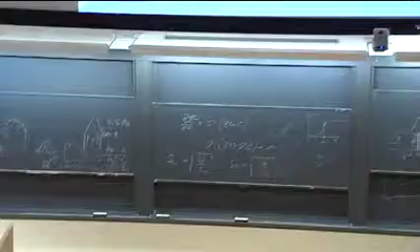We looked at models for the large-scale and small-scale turbulence regime by Damköhler, and these really capture all the physics. But they are two different expressions for two different regimes. It turns out one can derive an expression for the turbulent burning velocities that has these same limits, going to these expressions in the right limits, and one can derive that from an equation for the flame surface area ratio.

Flame surface area ratio, that was this sigma we had introduced earlier. This is very nice, so one derives an equation for that sigma. Let's see that equation. This would be an instantaneous equation for that sigma.

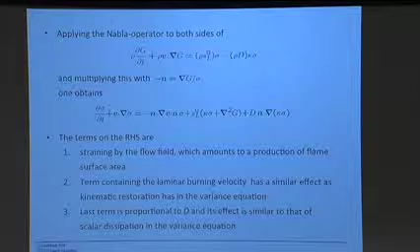In this equation there are some production terms. Well, there's of course the production term, which comes from turbulence. And there are two different dissipation terms. One is a dissipation term that takes out flame surface just by burning. We call this the kinematic restoration.

The simple physics behind this: you have something like this, a lot of flame surface, but if it burns this way and that way, once this is burned out, you have taken out flame surface. Just the process of burning itself eliminates the flame surface. That's what's called kinematic restoration.

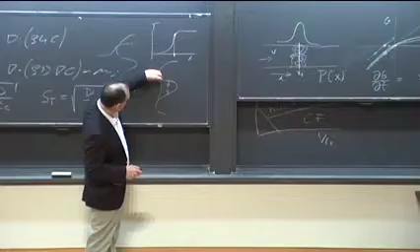And then there is also a dissipation of flame surface just by, again, the curvature effect. You can look at it like this also: if there's very strong curvature here, just by a diffusive process, the flame surface goes away. So that is the sigma equation.

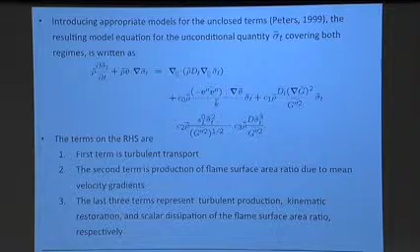Now the assumption is that these terms are being modeled. Let's see, here's the mean equation, and now you have all these terms on the right-hand side. We introduce models for these, and then assume that production equals dissipation, so the production of flame surface equals the dissipation of flame surface, which lets us discard these transport terms on the left-hand side. Then this can be solved for the sigma turbulent, which gives you an expression for the turbulent burning velocity.

This leads to an algebraic equation like this, and at the end of the day, this is what you get. You see there are lots of coefficients, and these coefficients mostly come from theory. You see that delta S here, that would be S turbulent minus SL, so that's the increase of the burning velocity by the turbulence.

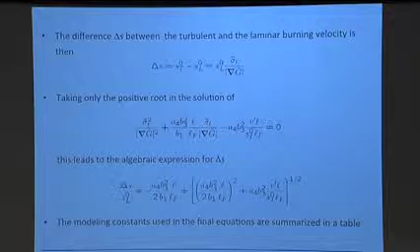And that is now a function of L over LF and V prime over SL. It's a quadratic equation because this was a quadratic equation, so it's a quadratic solution and so on.

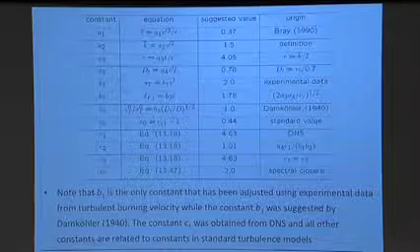There's a table with all these values here, and most of them come from either a definition, or from some theory, or typically used values like this. And then here there's this coefficient, which is actually the proportionality coefficient in this relation. Damköhler set that equal to 1, and that was also found from DNS and so on.

So anyways, once you have all of this, then we can plot this here again, and that line I showed you earlier actually comes from this.

What's interesting is, first, you can write this also as a function of the Damköhler number. So instead of writing St over SL, if you write St over V prime, that is a function only of the Damköhler number.

And then if you look at this equation as a function of the Damköhler number, you can look at the limits for small Damköhler number and for large Damköhler number. What you see is that, using what's shown here, it's not shown here, but if you do this you can try it out at home. If you look at the limits of large or small Damköhler number, you will find exactly these limits back again.

For the large Damköhler number limit, this term becomes zero and small, and you'll find that ST is proportional to V prime. In the small Damköhler number limit, you will find this relationship. So this captures both of these Damköhler limits, large and small.

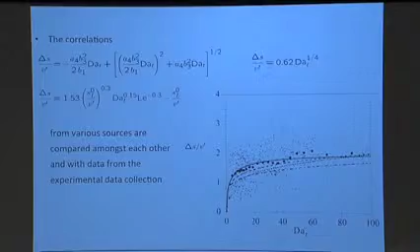You see, the black line, that's the model here. Then you have all these individual data points. And there's a huge spread here. But then you can take the average of this, conditional on the Damköhler number, and you get these black points. You see the black points actually correspond quite well to the model.

The other thing you see here, just from the data, is that ST over V prime goes to a constant for large Damköhler number. That's equal to 2 for large Damköhler number, which just shows that Damköhler's large-scale limit is included here, because that basically means ST is proportional to V prime, and the proportionality constant is equal to 2.

That's what the model includes here, and then this here would be Damköhler's small-scale limit, and here you see there's a very, very strong dependence on the Damköhler number.

Does that kind of mean that as we go to higher and higher number, somehow the turbulence becomes more important? Because it seems like you're saying velocity fluctuations are going to control the turbulence velocity. Yeah. And chemistry kind of is.

Well, what does large Damköhler number mean? It basically means that the chemical time scale goes to zero. It gets very, very fast, and that means the flame becomes thin, which means the turbulence doesn't see the flame structure anymore.

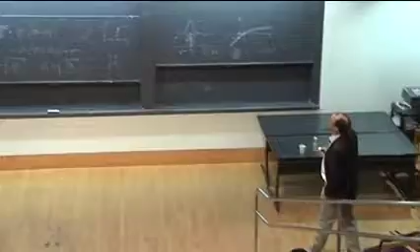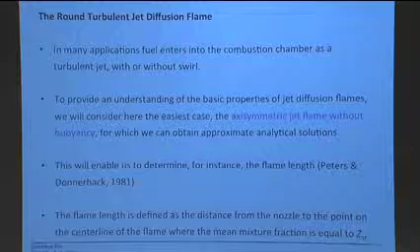First thing we want to do here is look at—so we talked a lot about non-premixed combustion already. We derived these flamelet equations, same thing as what we talked about here. These flamelet equations tell you all the mass fraction is a function of mixture fraction, which means if in the flow you know what the mixture fraction distribution is, you can map the temperature into that field. That's kind of what we do. And there's one little trick missing, and we'll talk about that.

But maybe first, we want to go back and remember for the laminar flame, we looked at an analytic solution, a similarity solution that ultimately gave us the flame length. And here, we want to do the same thing for the turbulent flame.

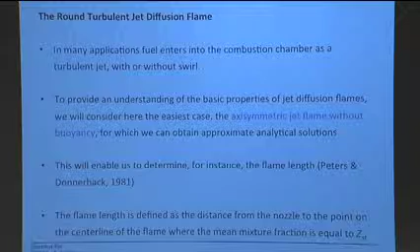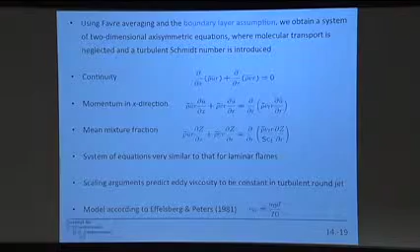And then you have these equations here that describe—now we talk about the Reynolds equation, the mean equations that describe the problem. You see here there's a turbulent diffusivity, and we have these three equations basically: velocity, momentum, velocity, the continuity equation, and then the mixture fraction equation.

Now, nu t, the original equation—what's interesting is that the original equation looks very much like this, with the exception that this here now has the nu t. That's basically the only difference we have. And the nu t, there's a model for this: nu t here is equal to a simple model, u times d divided by 70.

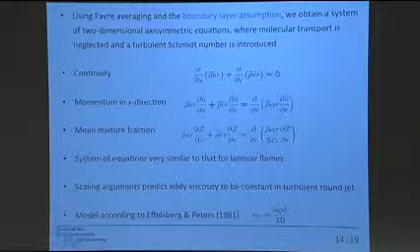So that model was found to predict some results. And what's interesting now is that because the equations are essentially exactly the same, just that one part has a different meaning, we can develop the solution in exactly the same way as for the laminar flame, just keeping in mind that this nu and the nu t are a little different.

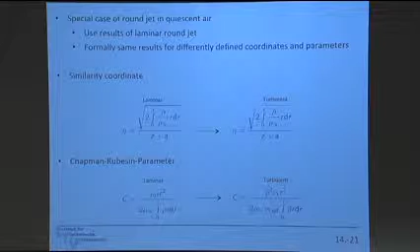And so this here was the similarity coordinate we had, and now the similarity coordinate here is essentially the same except for introducing the mean, and the same here for this transport parameter, except that this now is a turbulent transport, and this was a molecular transport. But otherwise, it's the same thing. And then you can develop the solution in exactly the same way, and this is what you get.

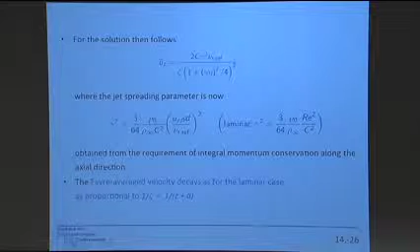And the most important thing here is that the spreading rate parameter now is a little different than what we had for the laminar case. This here is kind of a turbulence Reynolds number, and this is a laminar Reynolds number. However, what we found is that the centerline velocity goes with 1 over the distance from the nozzle, and that's the same in the laminar and the turbulent case. And for the mixture fraction profile, it's the same thing. It also goes with 1 over the distance from the nozzle, in the laminar and the turbulent case.

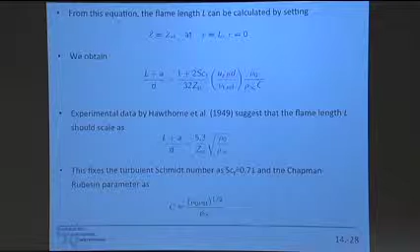Now, what's interesting, you take very old experiments that suggested that the flame length scales like this, with 1 over Z stoichiometric, and then the density ratio. And you see, we find the same thing here also. We have this C parameter, and if we want this and this to be the same, we just have to use the C parameter here like this. Okay, and then we get these two different solutions.

And that's the main difference. We said earlier, if you have the cigarette lighter and you crank up the flow speed, then the flame length became larger. Turns out for a turbulent flame, you crank up the flow speed, it doesn't become larger. Because we said this here should be equal to 70. That was our model. And so you see in this case here, this Reynolds number is a constant. And in this case here, it's not a constant. Okay? So that's the big difference between the laminar and the turbulent jet.

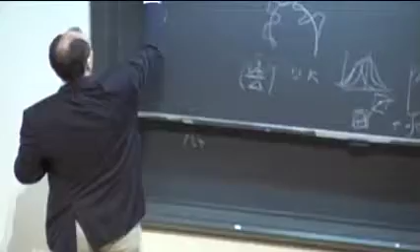If you do that, then you can solve the flamelet equations as function of mixture fraction and the dissipation rate. And you can compute all species mass fractions and the temperature as function of Z and the dissipation rate. Okay? And so that's a so-called flamelet library. This means now, in a computation, you have computational cells, and if in that one computational cell you know what the dissipation rate is and what the mixture fraction is, you can go in your library and look up what the mass fractions are.

Okay? So that's simple. That's what we call a conserved scalar-based model. Conserved scalar-based model basically means you solve the mixture fraction, and the mixture fraction is a conserved scalar, and then you have some sort of chemistry solution as function of that conserved scalar. Okay? Are there other conserved scalar-based models? Anyone know another conserved scalar-based model?

Yeah, there's another model. It's called the conditional moment closure model, where you solve equations that are very similar. Actually, the first order is the same as the flamelet equation. But I mean a simpler model. Anyone knows a simpler model?

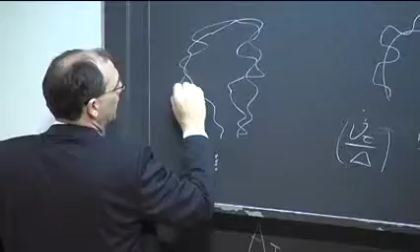Now, a little more complicated is that in a turbulent flow, if you compute a turbulent flame, think of RANS. This is my flame, this is another instant, and here's yet another instant. At different times this flame will look different. If I have a cell here, then in this cell I don't have one value of the mixture fraction. I have a distribution, a PDF, an expectation to find certain values of the mixture fraction in that cell. So in a turbulent flame, I need to know the PDF of mixture fraction in each cell.

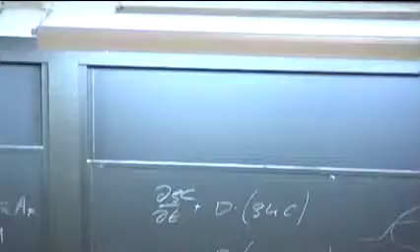In order to do this, it's good to know what the mean is and what the variance is. So the first thing we do here is derive equations for the mean and the variance. Here's the mean. We've done this earlier with the scalar flux model. And this is the variance equation, which we talked about before. Again, I'm running back and forth because I want to see this equation also. So here we have, again, the scalar flux term.

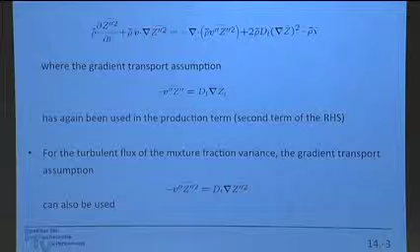We will model this like a diffusion term with a turbulent diffusivity, and then here there's a production term where we already used the model introduced earlier for the mean equation, and then here we have the dissipation term. And for the dissipation we also had a model. Let's see, it's here, the dissipation.

That came from the assumption that the scalar turbulent timescale and the mechanical turbulent timescale of the flow are the same. The timescale of the turbulence is given by k over epsilon, and the timescale of the scalar would be the variance of mixture fraction divided by chi. So we assume these are the same or proportional, and this is the model. You plug this in here and you see the equations close. So with these two equations, you know the mean and the variance.

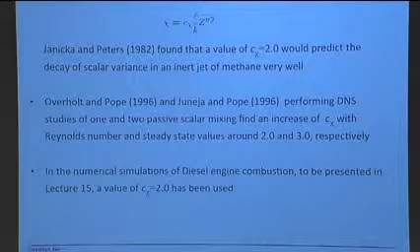This coefficient here is discussed here. People use different values for this. This same coefficient also appears in the closure for the PDF transport equation model, which we discussed earlier. And people use values all the way from 1 to 10 or whatever, and 2 is a very typical value that's used for this. But one thing we know about this is it's not a constant. It varies in turbulent fields. Okay, let's skip over this.

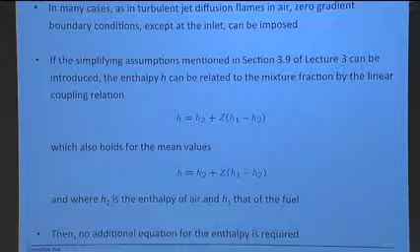All this says is that if the flow is adiabatic, say you have no heat losses, like take a jet like this, there's no wall heat transfer, and let's say radiation can be neglected, then the equation that describes the enthalpy has a mathematically similar form as the equation that describes mixture fraction. They both have a convection term, a turbulent transport term, and that's it. They're both conserved. Enthalpy is also conserved.

If there's no pressure change, then these also have the same boundary conditions. You have a jet like this. You have one mixture fraction in the fuel and one in the air, and similarly one enthalpy in the fuel and one in the air. So they're mathematically similar, and they're just linearly related. So you don't need to solve an extra energy equation if you have the mixture fraction equation.

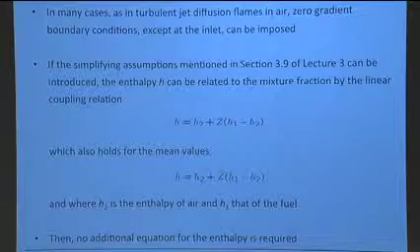However, if they have different boundary conditions or different source terms, you have evaporation, or the pressure term dP/dt is non-zero, like in an engine, then you need to consider an energy equation. And this is how it works if you need it. Okay.

Now we need the PDF of mixture fraction, and we have the mean and the variance. Typically, what people do is they presume a certain shape of the PDF. If you have the mean and the variance of a random variable, typically people assume what? Gaussian. Gaussian always sounds good because the central limit theorem tells you everything has to be Gaussian at some point, as long as things are complicated enough, and we think this is complicated.

Now here's the problem: Gaussian gives you non-zero probability for values of -50. The mixture fraction is positive. So people have used the clipped Gaussian: you clip it at 0 and at 1, since mixture fraction is defined only between 0 and 1. But then you still get funny behavior at 0 and 1. And then people came up with another thing called the beta function.

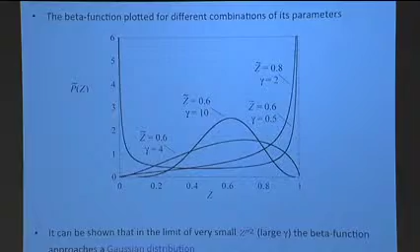It turns out that for very small variance, say you have a mean of 0.5 and the variance goes to 0, this actually becomes Gaussian. So if the distribution is far removed from the boundaries 0 and 1, this distribution becomes Gaussian.

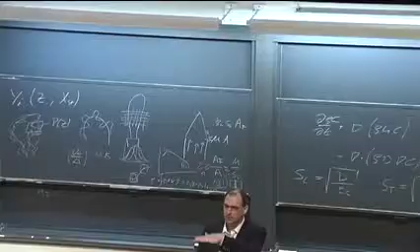Another problem in non-premixed combustion, which wouldn't be captured with a Gaussian, is this. Look at what happens very close to the nozzle. I do an experiment here. There's not been much mixing, but the turbulent jet goes like this. So I do measurements, and all I find is either I'm in pure fuel or I'm in pure air, because there hasn't been much mixing. What kind of a PDF does that give me?

Gives me a double delta function, right? There is the delta function at 0 and the delta function at 1. And depending on how much contribution I get from each, they have different strength. But interestingly, this beta function, for large variance, goes to a double delta function. Okay? And you see this here.

Let's go back here. Gamma is this divided by variance. So large variance means small gamma. And so if I have a big gamma, then you see I get something that looks like a Gaussian, but it goes to 0 here. So Z equal to 0, to remind you, is pure air. And this would be pure fuel stream. And it goes to 0 at these points.

But then when the variance becomes larger, which means this gamma value becomes smaller, then you see it gets broader, and at some point it flips over and gives you a delta function. Okay? So the beta function has these nice properties. It goes to a Gaussian for small variance, which is what we would expect, and it goes to a double delta function for large variance, which is also what we would expect. And in between, there's something.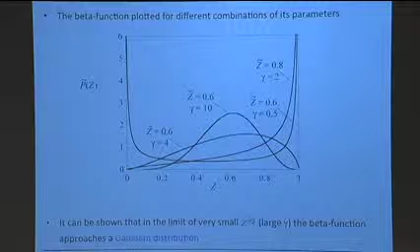A lot of people have compared this function with experimental data. It turns out, for the most part, it's quite good. So that means we actually have a model now for the PDF of mixture fraction, and that's good because the model for the PDF just depends on the mean and the variance. So we solve equations for the mean and the variance. From that, in each cell, we can determine this PDF of Z.

We have species mass fractions and temperature. We have these as function of Z from the flamelet library. And so you can actually integrate this to give you the mean. Okay? So this integration gives you the mean in each cell.

Okay, so what people typically do is, rather than solving equations for mean and variance, determining these in a cell, then computing with all the gamma functions the beta PDF and doing this integration, you can actually do this integration beforehand, because the beta function has only two parameters, the mean and the variance. Let's say you compute this for all possible combinations of mean and variance, a two-dimensional space. Then you can do the integration beforehand.

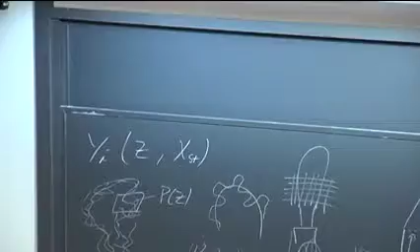And that gives you the mean mass fractions as function of mean of mixture fraction, variance of mixture fraction, and the dissipation rate. And then you can store that as a flamelet library. That's what people really call a flamelet library. And then in an actual simulation, you solve equations for mean and variance. From that, you can also compute the dissipation rate. And then you just go to the library and pick your mean values immediately.

Okay, it turns out here for the density, the density you use is not a Favre average density, it is a Reynolds average density because of the Favre averaging. That's just how it comes in. You've got to be a little careful. You actually integrate over 1 over the density and so on. But that's a detail.

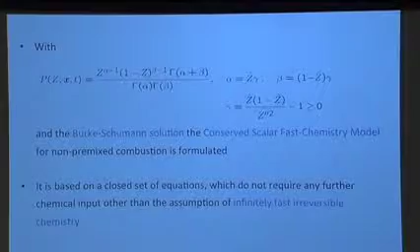And then here this is mentioned again. Once you have the PDF of the conserved scalar, you can use any conserved scalar-based model, which would be a flamelet model, or a Burke-Schumann solution, or you could use reversible infinitely fast chemistry, which is chemical equilibrium.

Okay, so now we could look at, does that make any sense? Isn't the Burke-Schumann as good as the flamelet model and so on? And so for that, we can look at data here for turbulent flames. This here is old data by Masri and Barlow, in a turbulent jet.

If you take the data at a certain cross-section, you can plot all these mass fractions, or mole fractions, as function of the mixture fraction. If you measure the mixture fraction and the species at the same time, you can plot one as function of the other. That is an interesting thing to do, no matter if you want to do modeling or not. If you have that data, plotting it like this will tell you something about what's going on.

Remember what this tells you if you look at a plot like this? Can you tell me where the heat release is?

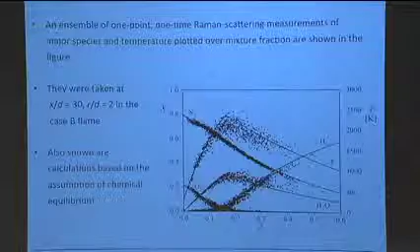Now, what you see here is these lines represent chemical equilibrium. Hydrogen here is the fuel. So what you see is chemical equilibrium is actually not bad. Okay, it represents these values here quite well, let's say. Okay, so this is the chemical equilibrium line, this here.

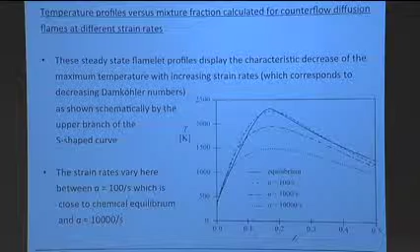And then these here are different flamelet solutions with different dissipation rates. They're here written as counterflow diffusion flames with different strain rates, but these are equivalent. Okay, and then you see that there are changes here. The temperature changes with strain rate. Which explains why you get so much variation here in the temperature profile.

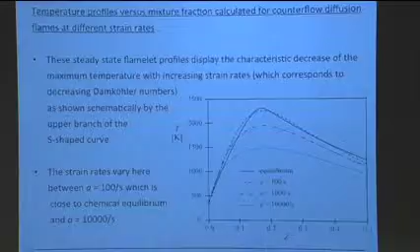So look at this, the equilibrium, that's kind of the highest temperature here. And in reality, you don't have equilibrium, you have residence time effects, and this gives you then lower temperature. And that's what you see here also. Now, we look at other species, like OH, you see equilibrium is really bad. This is equilibrium, and this is the OH mass fraction.

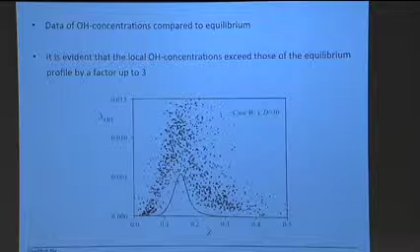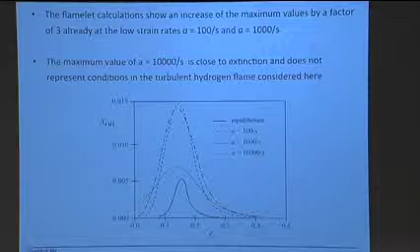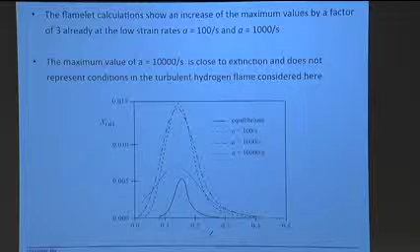What you see is the radicals, they start low, they go up, and then they drop off. They drop off when it comes to extinction. So this here must be very, very close to extinction. Okay? Now I compare this with this here, somewhere between 0.005 and 0.015. Then you see, it's kind of what you get here. So including this effect of strain or dissipation rate would give you better results.

Let's see. Interesting is, here we said equilibrium was actually pretty good. What happens if you do the same thing for a methane flame? How would that look? Temperature. Let's say this is how equilibrium looks, roughly. No, I'm sorry. This is how Burke-Schumann looks, okay? Full conversion, irreversible reaction, infinitely fast, okay?

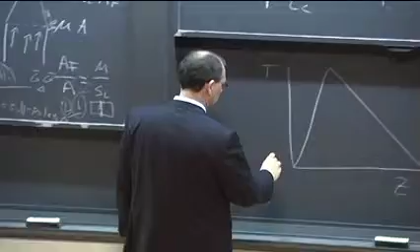And then this is how the measurement roughly looks. It's not exactly on the line. Especially here you will see a little difference, but it's not all that bad. What if you look at chemical equilibrium? What would happen? Who thinks it would be the same? No one. Good.

I can't change it. Anyways, it is very different. What happens is, this is equilibrium. In the lean, it's almost exactly the same. In the rich, chemical equilibrium for methane forms, let's say, some methyl, and this methyl recombines to give you C2H6.

So on the rich side, you have a lot of carbon, you have a lot of hydrogen, and in equilibrium, you get a lot of ethane, acetylene, C3 species, C4 species, and so on. You just form a lot of very big hydrocarbons. Okay? What does that mean for the temperature? It has to go down, right? Because this is stuff that didn't burn. So equilibrium here looks like this.

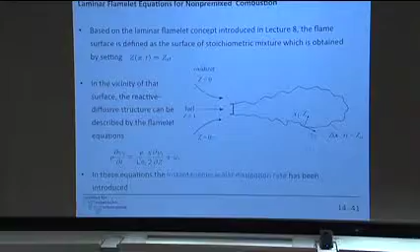Okay, so we talked about the PDF, and here it's just a review of how these flamelet equations are derived, but we did this earlier, so we don't need to go into any details of this.

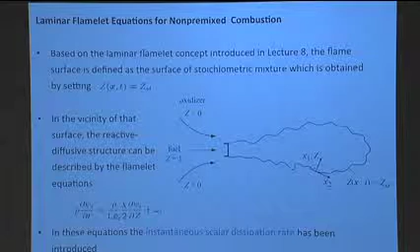What is pointed out here, maybe it's too much detail for what we're discussing, is that you have this parameter, dissipation rate. When I said earlier we solve these equations as a function of dissipation rate, or with dissipation rate as a parameter, we use all possible values of dissipation rate we can think of, and then we build these flamelet libraries.

There's one thing here one has to be mindful of: when I said dissipation rate is a parameter, actually dissipation rate here is a function of mixture fraction also. There's nothing that says this is one value - this is a function of. So what is this? The dissipation rate was proportional to the gradient of mixture fraction.

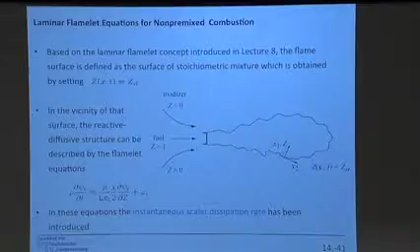In a non-premixed flame, let's take this counterflow diffusion flame. The gradient of the mixture fraction between the two nozzles goes like this. So dissipation rate is 0 here, dissipation rate is 0 here because the gradient is 0, and it's maximum here. So it kind of looks like this. So it's a function of mixture fraction, and we need to model this function somehow.

What we do typically - let's see if it's mentioned here - is you take a counterflow, and we saw, though not in detail, very briefly, that there's an analytic solution for what the dissipation rate is for a counterflow. It turns out what I draw here, which looks like an inverse complementary error function to you maybe - turns out that is an inverse complementary error function.

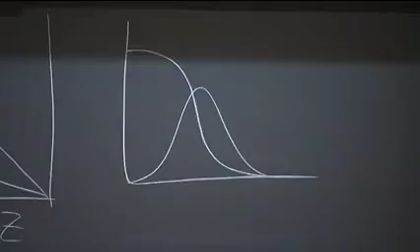So that is the analytic solution, and we use that analytic solution that we get from a simple configuration in this computation. It turns out that inverse complementary error function has just one free parameter, and that fixes the dissipation rate at one value. We typically fix it at stoichiometric, because that's what's most important. So that's just a little detail here.

Once you do that, you can solve it, and now you see it's the stoichiometric dissipation rate that appears here as a parameter. Let's see - this is this function here, right? Dissipation rate is exponential and so on, inverse complementary error function. This is a little hard to evaluate numerically in code.

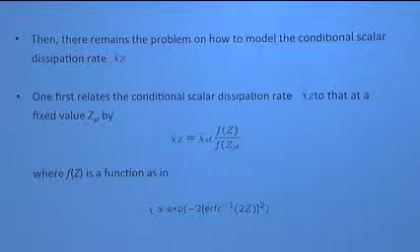It's not so hard, but you could argue, well, that relies on assuming you have a counterflow. It turns out if you don't assume a counterflow, if you assume just a mixing layer, you get the same solution. So this is a solution you don't only get for the counterflow, you get it for other configurations also. There are also simpler functions that describe this dependence one could use, but it turns out it doesn't make a difference.

So there are some details here on how you evaluate this parameter now in a turbulent flow simulation, and you can look this up if you ever need it. It's not very complicated, but I think we should skip this here. And then here we have

now solutions to these flamelet equations that you would get in case you don't have a steady state configuration. I showed you what to do when these flamelet equations are in steady state and can be tabulated. But if you're interested in engines, for internal combustion - a diesel engine, for example - you inject the fuel, and then you get ignition at some point. That's of course not steady state at all, you have very strong changes as a function of time. In that case, you can use unsteady solutions of the flamelet equations, shown here.

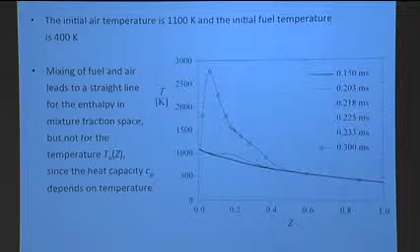What's interesting here, maybe some of you know this, is that stoichiometric - we said for typical fuel, this is probably N-heptane, for typical fuels stoichiometric is about 0.05, for heptane it's 0.06. Let's see what happens at 0.06 - that would be around here. And you see that's where the maximum temperature is once it's burning. That makes sense. Does it ignite also at stoichiometric?

No, it ignites in the rich, in the very rich actually. You look at this here, this is about 4 times the mixture fraction, or 4 times stoichiometric mixture fraction. And this is where it ignites. Does that make sense?

Yes, it makes sense because if you just have fuel and oxygen, no radicals, and you have all these oxygen molecules flying around looking for hydrogens and carbons. But the carbons are shielded by the hydrogens anyway. A lot of the fuel mass doesn't participate in the early radical production process. And so that is why a very rich mixture actually ignites much better than a stoichiometric mixture.

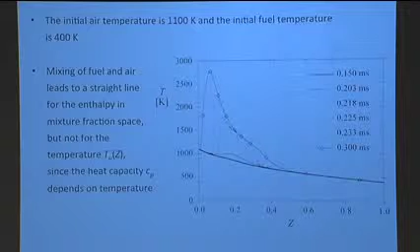So you see you have competing effects here. The richer mixture wants to ignite earlier, which means ignition takes place over there, but then also the hotter mixture wants to ignite earlier, which means ignition wants to take place over there. So there are two competing effects, but you see here the richer mixture wins, and that is partially because it's right around the temperature roughly here where you have this NTC behavior, so the ignition delay time doesn't depend very much on the temperature.

Okay, so I think this is all I want to say about modeling non-premixed combustion. If we have some time left, maybe we can stop earlier today, which would probably also go well with Professor Law's plan. But I want to show you some applications, LES applications, very briefly. Any questions about this?

About this one - you're saying that richer mixture wants to ignite where the fuel is abundant. Does that say that the fuel breaks down at higher temperatures before ignition?

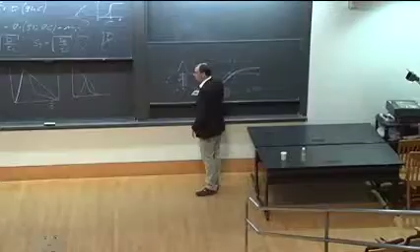No. See, the higher temperature is actually on this side, right? But still it ignites over there at lower temperature. And that is because, well, think in terms of equivalence ratio. So you would think at stoichiometric everything should burn best, okay? Because each oxygen has a partner to do some work. But if you have...

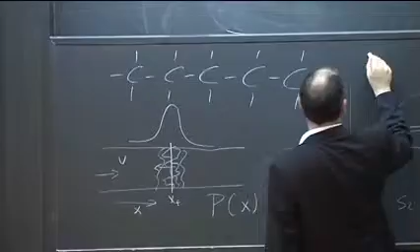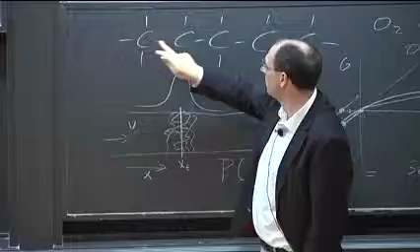a fuel, let's say like N-heptane, or pentane, okay? And now stoichiometrically, I have a lot of oxygen here, right? And that oxygen, it can try to react with this. But in the very early part, later on you have all these fragments, and the oxygen tries to do something with these fragments. In the very beginning, all these carbons can't even participate in the reactions. And so if you take these out, then overall it seems like this would be very fuel lean, because these guys right now are inert, they don't do anything. And so you have to have a lot more fuel to make up for this, to provide more fuel.

Okay, other questions? No, okay. So there are two things I wanted to show you. Yeah, go ahead.

When you parameterize the mass fraction by Z and chi stoichiometric, can you parameterize it faster? When you're characterizing, parameterizing yi in terms of chi stoichiometric, is that very accurate for turbulent flows? Because the scalar dissipation rate should vary with Z, and we're using just one value at the stoichiometric.

Well, when you solve these flamelets, you actually use chi as a function of Z. It kind of assumes that locally you have these mixing layers, that you have stoichiometric, and then something leaner on one side, something richer on the other side. And then you get this kind of a bell-shaped distribution. For very, very high turbulence, it turns out that you should get something that is more flat than that.

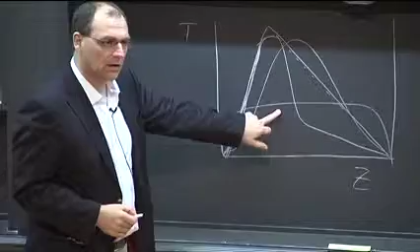But typically, we don't have these very, very high Reynolds numbers in most applications. So if you have something like this, or at lower, this space where you have something like this, or like this, then it turns out you have this functional dependence, but you can parameterize these with just one value. It could be the dissipation rate, or some value here to characterize these profiles.

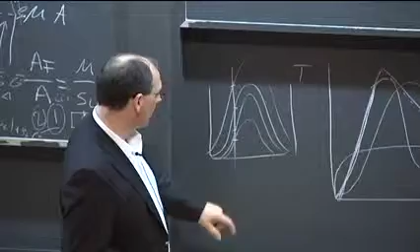Typically, what we do is we use the stoichiometric value, and that's very good because it turns out that value is most important. If you have the right value at stoichiometric conditions, and the right dependence at that point, then you pretty much get the right result. It doesn't matter too much what value you specify far away from there. Okay, do you have a question?

In the last diagram, how does that auto-ignition change with pressure?

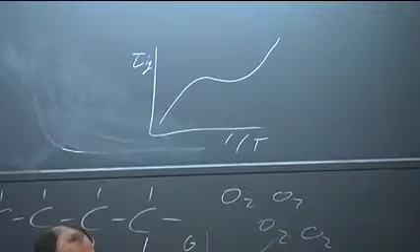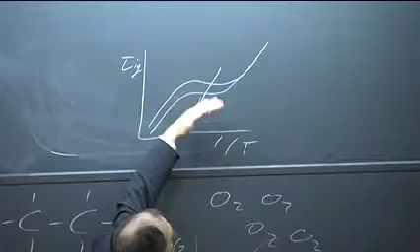It turns out this is how it looks: ignition as a function of 1 over temperature looks like this, for these longer hydrocarbons. If you go to high pressure, it turns out that ignition delay at low temperature doesn't change very much, but at higher temperature, it does change. So this would be the pressure dependence of ignition delay time, and you see it just becomes much shorter. Similarly, if you look at the equivalence ratio dependence here and there, they look roughly the same.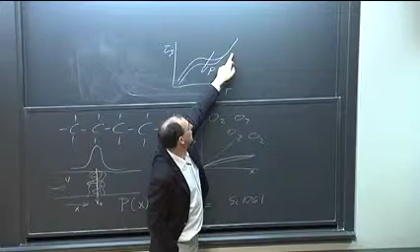And you get here for these very, very low temperatures, it makes a difference if you compare lean with stoichiometric or stoichiometric with rich - there's a different dependence there also. But this is roughly how it looks like. That's what I said earlier: if you have very low temperatures and you increase the temperature, the ignition delay time becomes shorter, exponentially shorter. This is a logarithmic scale. But then at some point, you get to a regime where the ignition delay time with temperature doesn't change very much, or even gets longer again. And then when you go to very high temperature, it goes down again.

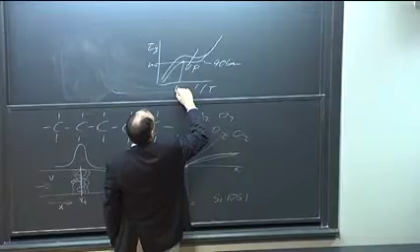Typical for a diesel engine would be this here, let's say 40 or 50 bar. And then this point here is about 1 millisecond, and it's about 1,000 Kelvin. So this is roughly what you get.

Other questions? Yes. So you showed us for this specific situation happening, the ignition actually happens faster for rich mixture? How does it depend on the fuel?

That is pretty much the case for every fuel. I don't know a fuel that would ignite faster for lean conditions. This is because, in the beginning, a lot of the fuel cannot participate in the reactions, so you have a lot more O2 than possibilities for O2 to react with. So the shorter the fuel becomes, the less that should be an issue.

But typically, you have to go very, very rich to really find the minimum ignition delay time as a function of equivalence ratio. At some point, it has to go up again - you're very rich and it needs to go up again. But you have to go very far in equivalence ratio to find the minimum. Here, because the temperature gets higher in this direction, there's a competing effect.

Now imagine you make a very small error. So you have a difference of two large numbers. Let's say you make a small error in one of these numbers. That means immediately you have a huge error in your prediction. And in the gas turbine it's very similar.

You form tons of soot because, as I said earlier, in a gas turbine you want to burn rich, close to the nozzle. That makes it very stable. When you burn rich, you form tons of soot, and then later on you mix it out and you try to oxidize. This is a high-speed video that was taken at Air Force Research Lab in Dayton, Ohio. I got this from Mel Roquemore, and this is a gas turbine.

And what you see here, flow goes from, this violates the first law of fluid mechanics. You guys know the first law of fluid mechanics? Flow goes from left to right. So this violates that. The flow here goes from right to left.

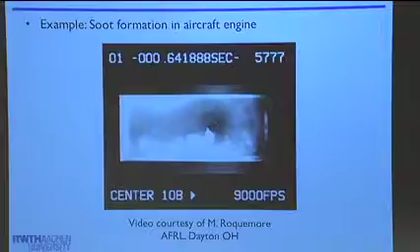This is the injector. You have a swirl injector, swirling flow coming in, fuel injected into this, and then you get a recirculation. With that recirculation you recirculate rich gases. You bring this back, and that creates a very stable flame. So what you see here, the very bright stuff, that is soot.

And now watch what happens with soot. You form some soot here, and then mostly it burns out before you leave the engine. And then once in a while, you form a lot of smoke, like now, and somehow this smoke is not being oxidized, and this huge cloud here leaves the engine. And then, look after this, no soot. No soot, and so on. See, this is what I mean with intermittency.

So when you see an airplane flying and there's soot coming out of the exhaust, which you don't see very often these days, that's not because you continuously have a flow of soot. That is because you sometimes form soot, and then you don't form soot for a long, long time, and then you form soot. And that just happens on a time scale where you just see the smoke coming out. So that's very important.

And then again, if you want to predict this with a Reynolds-averaged code, there's no chance, because a Reynolds-averaged code just solves for the mean, and the mean is a very small, non-zero soot concentration, which comes from zero most of the time and then one big patch. That's very hard to model in the Reynolds-averaged context.

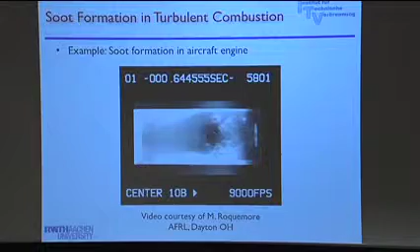Yeah, this video actually I cut out from a very long video, because otherwise you always have to wait for this one time. But this is a very long video, and this happens only twice. This is the worst one, and there's another one. It's not quite as strong, but for most of the time, there's no.

Now, is that important or not? The oxidation rate, I said earlier, oxidation is very important. The oxidation rate depends on the surface area, okay? So that means an error in the surface area translates into an error in the oxidation rate. So, yes, it is important, that's the point.

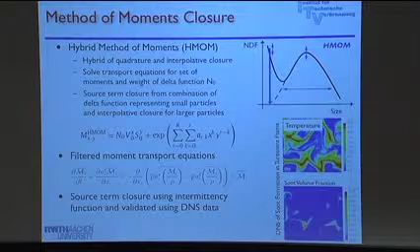You know, the statistical models that one has to use, and I don't want to bore you with this, I just show you an application now. So we have developed models for all of this, and I mentioned this to some of you yesterday, which is why I remember to show this to you. We have worked with Pratt & Whitney for a long time, and Pratt & Whitney and all other engine companies, they always come and say, "Hey, can you predict soot?" That's the thing they can't do with the codes they have.

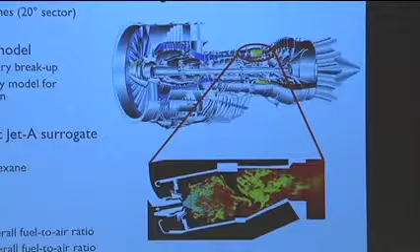They don't even use commercial codes. They usually have their own codes. Almost all the engine companies have their own code, but they can't predict soot. Okay, and so we said, of course we can predict soot. And so we did simulations like this, where we looked at the temperature profile here or whatever, and it looked all right. And so we put our soot models in the code, and it was bad. It was off by like 5 orders of magnitude. This was 2003 or whatever.

So I had a student, I said, hey, we need to go back and start from scratch. So we worked on the chemistry for a long time. We worked on the statistical models for a long time. We worked on some of the sub-models here for oxidation and fragmentation of particles and so on. So we went through the entire modeling process again, and we made a lot of changes, and then the model was finally done. So I had 2 students who worked on this over the past 10 years, and then we decided the model is good again.

It was validated with a lot of stuff, and I don't have this here, but we validated also with jet diffusion flames and bluff body stabilized diffusion flames and so on. So we did all the homework, okay, and then we said, okay, now let's put this back again in the same simulation we did 10 years ago, and let's see what we get. Okay? So this is a Pratt & Whitney engine, and you have the compressor, you have the turbine, and this is the combustor, and this is just a sketch here, but this is an actual simulation.

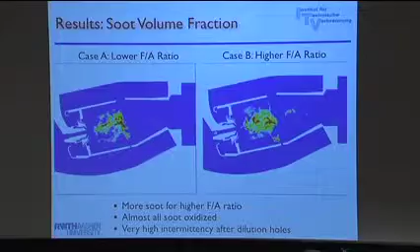Now, this is the quench zone, and you see by injecting here the air that comes here around, this here forms a lean combustion region, and you see all the smoke here is basically burned away very quickly. Okay? But then once in a while, again, you see that here a little patch, or here a little patch leaves the engine, especially for the high equivalence ratio. You see this very light green here leaving the engine once in a while. But you see how much smoke is formed, compared to how little leaves the engine. Okay, so this is why this is very challenging.

Okay, and this is interesting because it showed that we worked a lot to do the fundamentals right, to do the theory right, not use empirical models and all of that. We did DNS of this thing to understand the interaction of soot with the turbulence and so on. And once everything is in place, plug and play. There's no tuning, and you get a result that actually looks quite reasonable. That's really what I just want to show you here. If you do things right, then sometimes you get the right answer.

That's very good. Okay, but what's interesting about this now also is, let's say we get roughly the right answer, then we can go back into the results and we can look at how this soot was formed. Because now in the simulations you have all that stuff. And what's interesting is that nucleation, that's the process of forming the first particles from the gas phase.

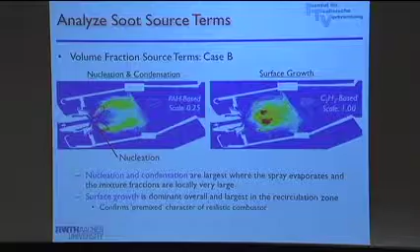Condensation, that's a process of having PAHs condensing on the surface. So both of these processes, they depend on having large-scale aromatics that kind of either come together or stick somehow on the particle. Surface growth, that is the mass growth by interaction with smaller unsaturated hydrocarbon species in the gas phase, like acetylene. So actually this is all acetylene-based, and this is the so-called HACA mechanism. You might have heard this, H abstraction, carbon addition.

So basically you have the particle, you take out an H on the surface, which means you have a kind of a radical site now on the surface of the particle, and you attach an acetylene to it, and all of a sudden you have increased the mass by 2 carbons. Okay? You do this over and over again. This is how these particles grow. So we have this PAH-based growth of particles and the acetylene-based growth of particles.

And what you see here, interestingly, is that it's all surface growth based. Almost no mass comes from this. You see this is scale 0.25, so you wouldn't even see this on the same scale as this, or you wouldn't see very much. Okay? Now, I get very excited about this, but why is this so interesting? This is very interesting because when we go to laminar flames, we see that this usually happens in non-premixed flames. This usually happens in premixed flames.

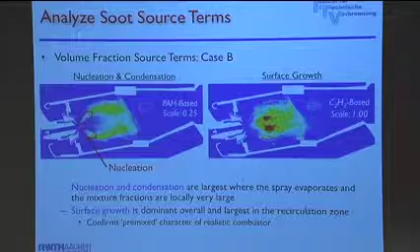Okay? Now here we have a gas turbine engine where, again, we inject liquid fuel into air, and you would think this is non-premixed. But the soot growth mechanisms would tell you the opposite. As I said earlier, we did DNS of something similar to this. We tried to look at premixed, non-premixed. We found actually, even in these aircraft engines, mostly it is premixed. And the way soot grows also tells us this.

And now what's most interesting is that the model, the way it's formulated, actually picks that up. It picks up the fact that this gas turbine, although we always use it as a prototypical aircraft engine, as a prototypical example for non-premixed, is actually mostly premixed. Okay, that's interesting.

Now we did other simulations. It's not the same simulation, but it's the same engine. Everything else same. These are older simulations. We predict NO, and here you see it's so rich here, you don't form much NO. And then, after the secondary air, the mixing is not ideal. And so you do get regions which are still pretty hot, close to stoichiometric, and you still get a lot of NOx formation downstream of this.

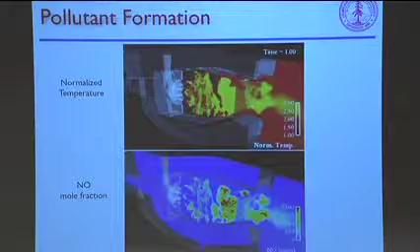And this just shows, for those of you in fluid mechanics, mixing is still a really, really important problem. Just mixing of one stream with the other. Good. So we compared this with experiments also. I don't know why this didn't go forward. Yeah. Interesting here, we did 2 simulations, one with radiation, one without.

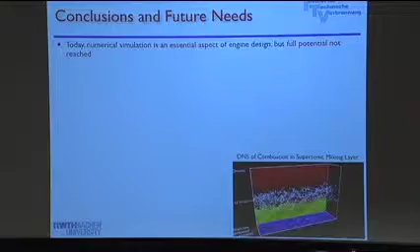So does this mean other mechanisms for with radiation versus without radiation? You were talking earlier about how the mechanism may play less of a part. Yes, but we're not that far down here. This is actually thermal NO. Yeah, this is all thermal.

Okay, I showed this from a different talk, and so this was probably the conclusion for that talk. This is interesting, this combustion simulation here, right? And I showed this here at the end to impress people with these nice colors.